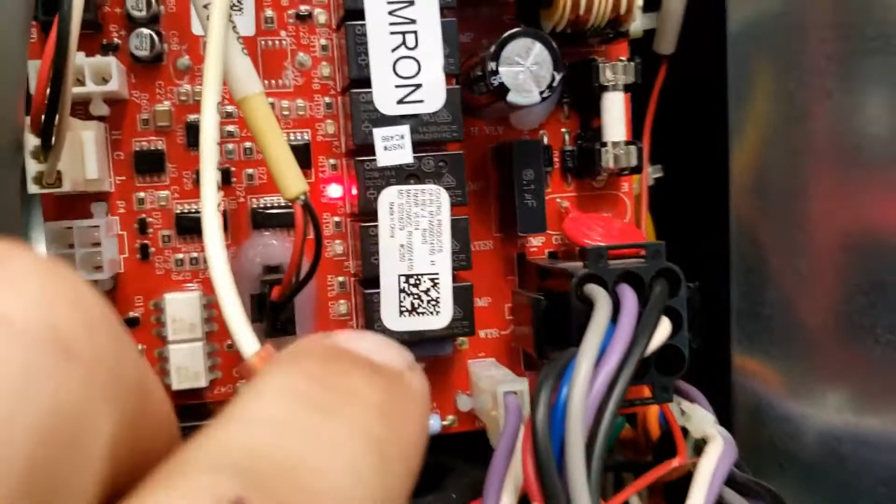Alright, we got an ice machine here. It's doing a little funny thing. Originally said calling for making ice, but according to that, we're not getting the compressor to run. When you come up here, the compressor's not hot, so I don't know why it's not running. It's not even calling for it to run, but yet it thinks it should be running, but it's not running.

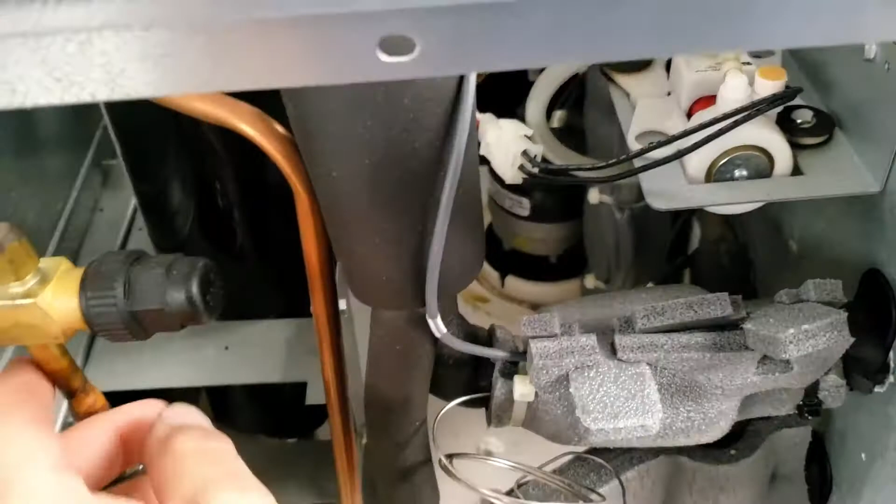Now, that was warm at one time. Yeah, there it is, dumping the water out. This is acting very odd. So right there, it just did the dump valve. It's acting very, very odd. So we installed the control board yesterday. Here's some of the history.

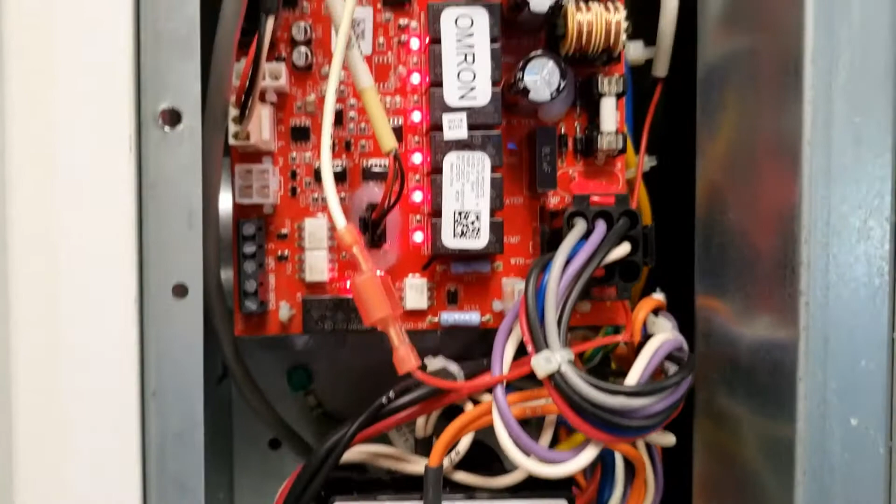Maximum freeze, nothing. That's a little weird. Let's go to that. This is not jiving. Something is very wrong. Okay, enable relays. And there it did it. So we got the contactor in. You can hear the compressor running. You can see the pump there running.

That's hooked up. You can feel that solenoid. And the compressor is definitely running. So everything for the most part looks like it's probably working. Here's the water valve, which we should be able to look down below and see if that's working. Yeah. So the water valve's working. So all the relays are working.

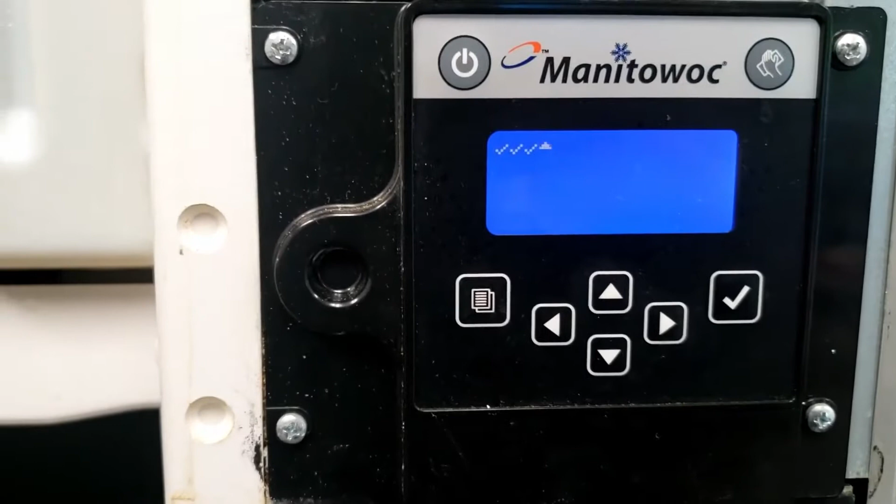Let's do a self-check. See what we get there. Something seems a little peculiar here. But I don't know why it would say it was making ice and then... Okay. Keypad test, so when you do this it'll correspond. So see that one there, top one, bottom one, top left, top right, bottom right, and bottom left. And then you gotta do 5 to the right to get out of here. 5. Yes. So we've already done all that, so we can exit that.

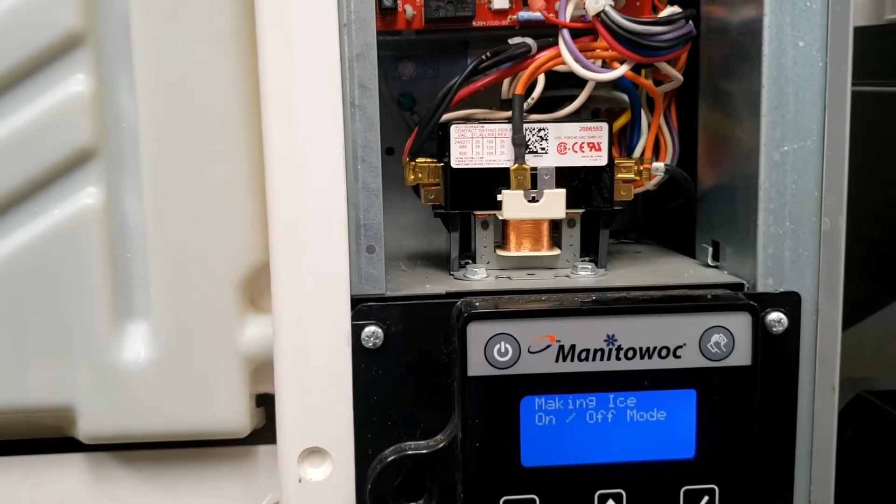So that's interesting. So now let's go to make ice and see what it does. First thing it should do is pump it out and dump it and start to fill and start to freeze with the pump off. So let's see what happens here. So we got to make ice, and she is running the compressor and the water valve is on. This is definitely a little bit odd. It's almost like it had a glitch.

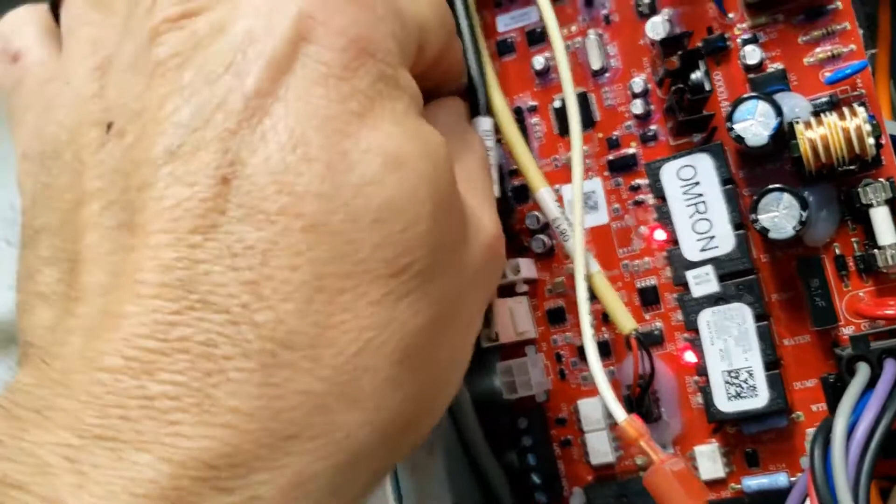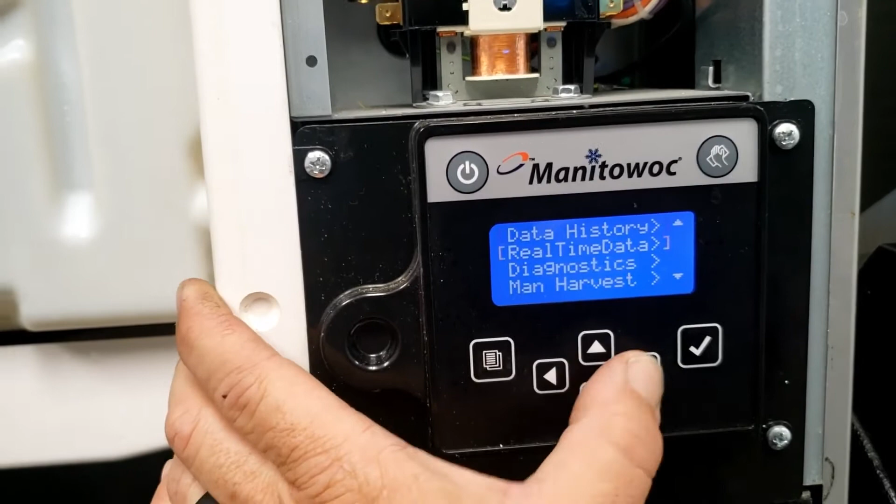These plugs are in. I've already checked my T sensors here. Ground's hooked up. Curtain we know works. We can go in there and look at our thermistors. So discharge gas is 130. Liquid, I believe, 114, which seems a little high. That's where it's at. This will tell you where things are at and what's going on. May have to go up on the roof, take a look. Might have something going on with that. That's not going to help it none if it's too hot.

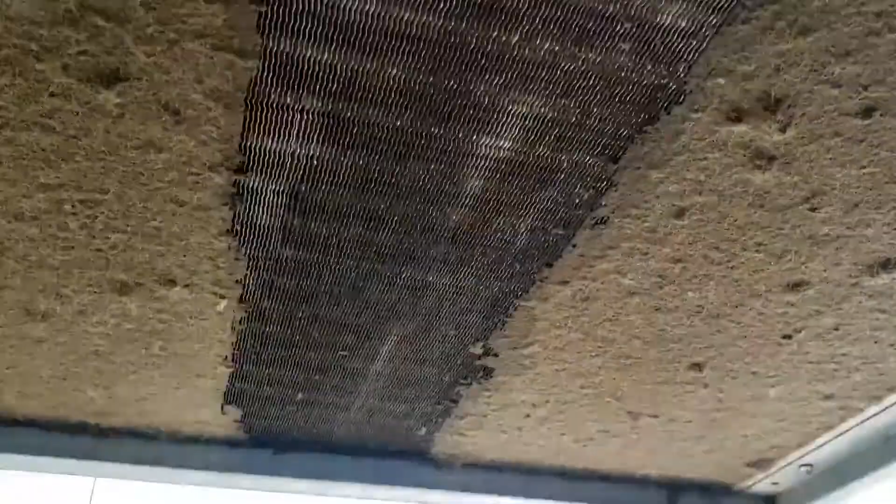See, now we're actually dropping in temp, and our delta T is 3. Usually want 7 or less. That makes me think that coil's a little bit dirty up on the roof, so I may have to go up there and take a look. So I scraped a little bit off there with my brush. You can see it's kind of packed, and the cottonwood's getting kind of bad.

In this location, someone else maintains it until it breaks, and then we get called. So I'm gonna go ahead and finish cleaning this off. Got me a new brush, fancy new brush, and it does a wonderful good job. So just wonderful.

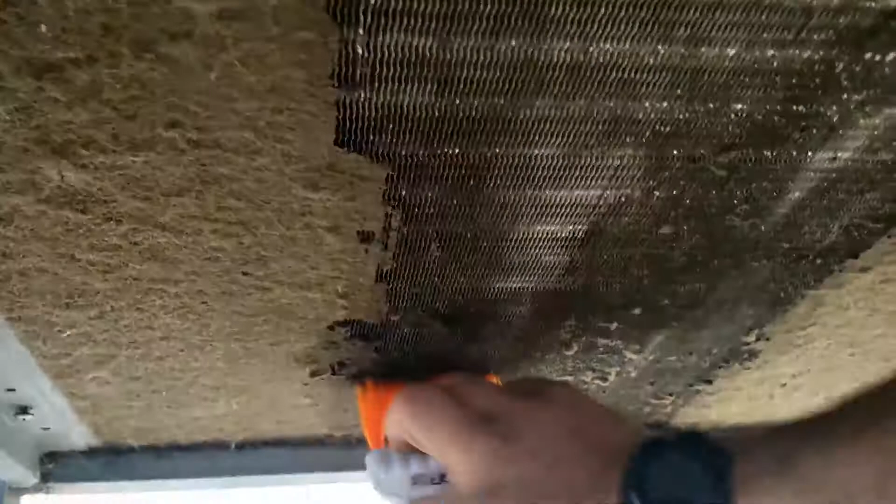So yeah, we'll just get this thing cleaned up, and then we're gonna go down there and see how it does. But what's weird is this would not have caused that board to do that weird thing that it's doing. There's no reason for that to say that it's making ice and it's not, and not run the compressor. So obviously this would cause some issues, but it would not cause the issue we got. Anyhow, we're gonna get this cleaned up.

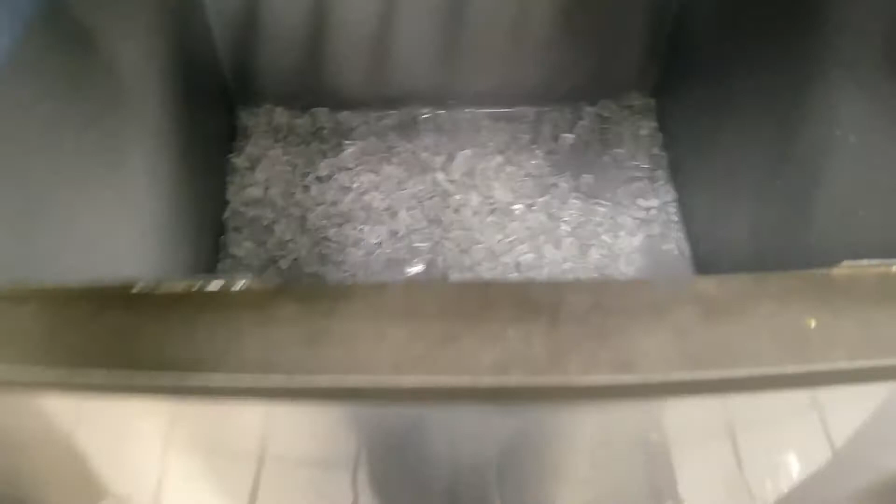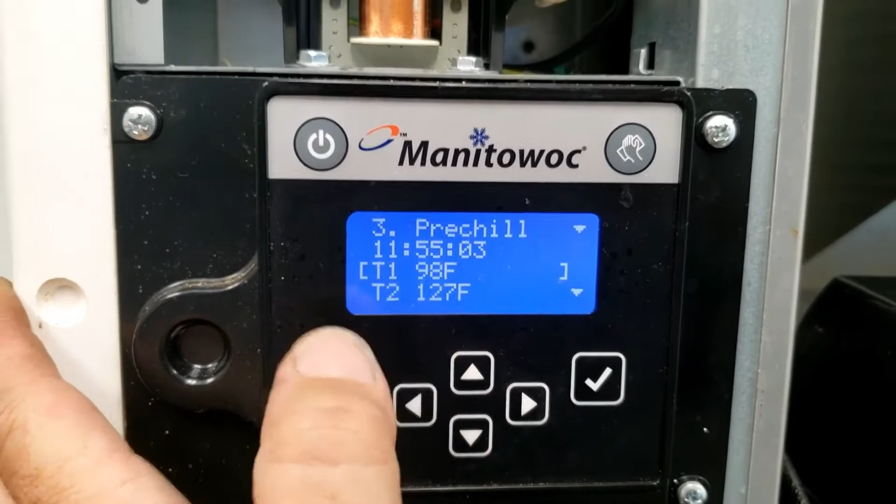Okay, it looks like we dropped some ice because we're in a pre-chill already. Our liquid temperature there is at 98, which is a lot better than 113, which may change a little bit as we start running. We're gonna check our pressures while we're at it, just because it felt a little bit cool up there for being a hot day. Alright, so there's our pressures. We're into the freeze. We'll go ahead and start our stopwatch. We're going to watch that for 5 minutes and see where we're at.

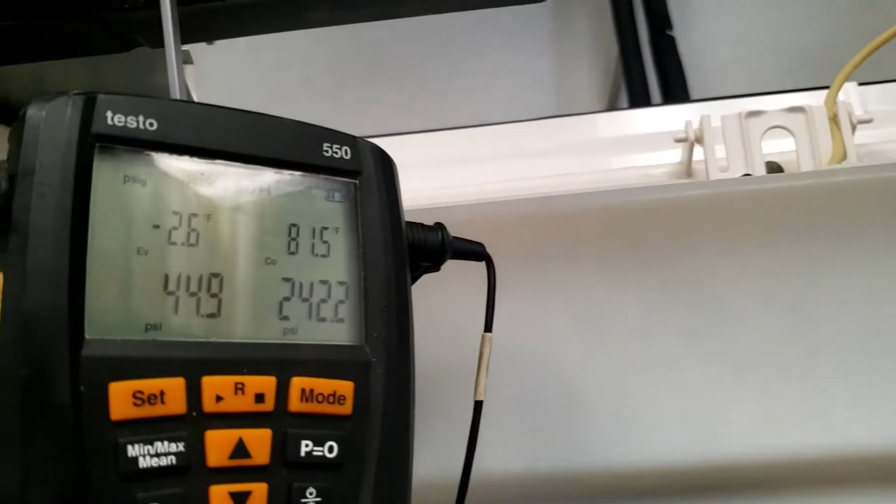Like I said, this is really acting odd. Now it's making ice. Supposedly it was doing fine yesterday after the board was replaced. So we have an IY0696N261. So the I is that it is an Indigo machine. The Y is the type of cube it is. It's a half dice. The 1000 is the machine series.

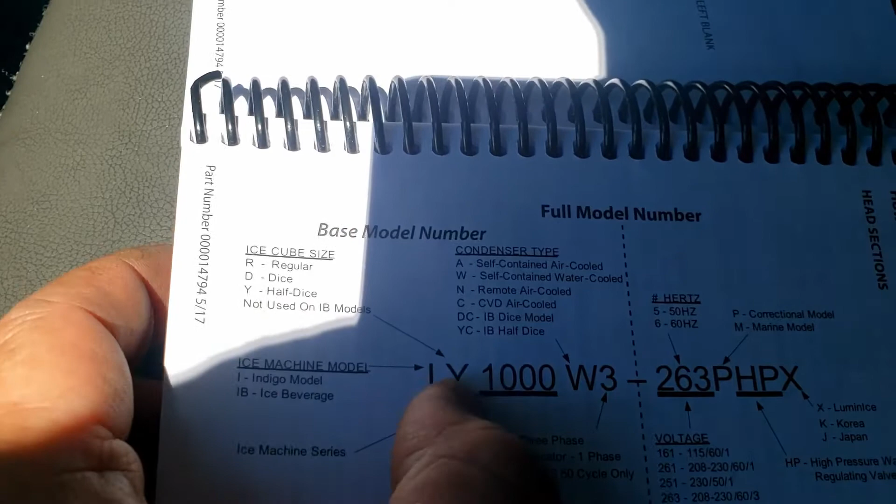They're testing the sirens for the emergency test they do.

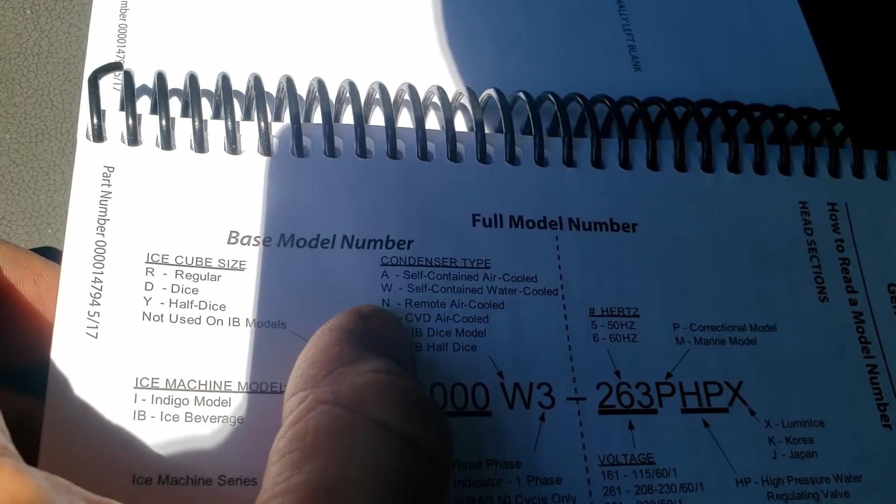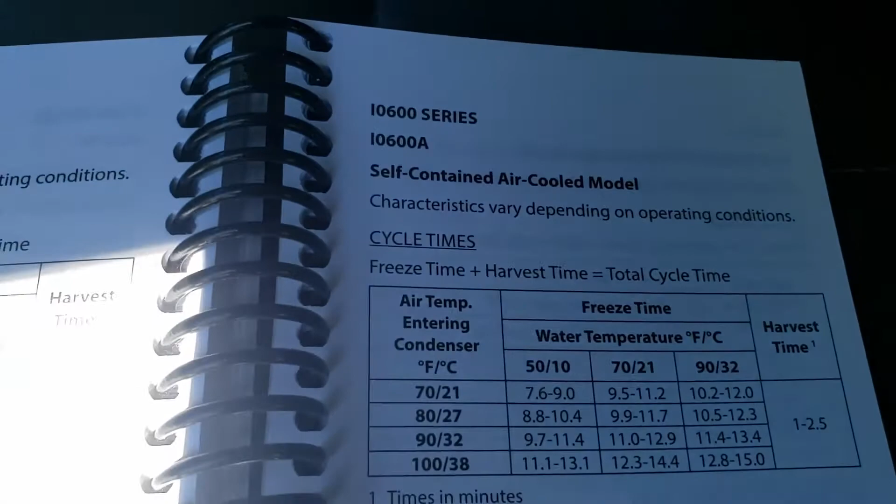So 600 is what the machine is. The W is a self-contained water, which mine is an N for Nancy. So it's remote cooled, that's correct. So anyhow, we pop over here to the IO600 series. So we come down, we look at it. This is self-contained air-cooled. So here's a remote.

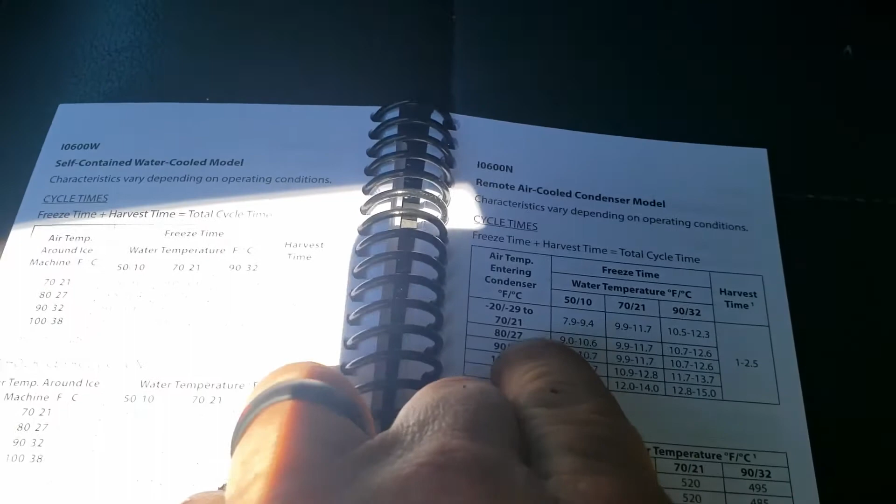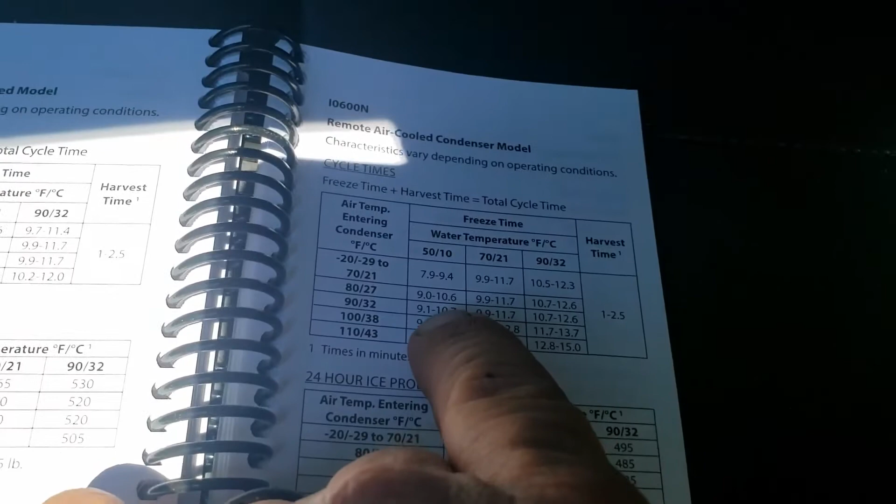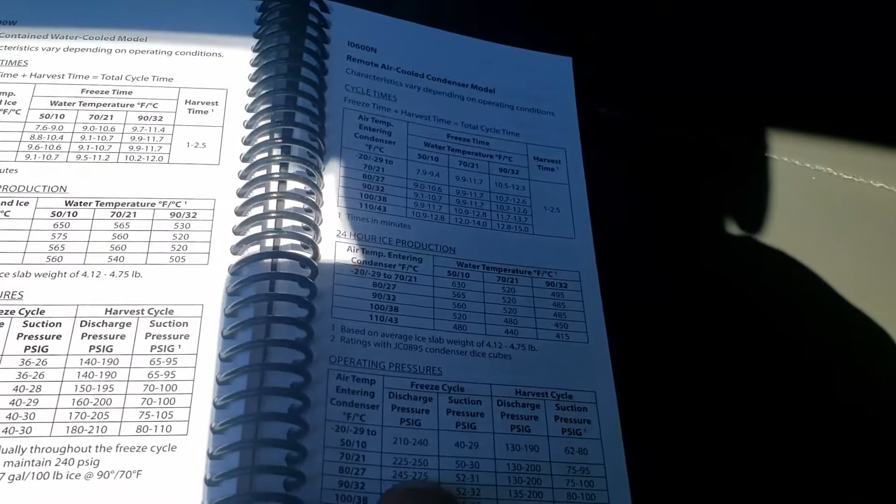So on the air temperature, today's about 85 to 90, and our water's coming in probably in the 50 range. Harvest should be about 1 minute to 2 and a half minutes, and the freeze cycle should be about 9 to 10.7 freeze time. So there's your production and operating pressures. Operating pressures look like it should be a little bit higher. I was wondering if it may be just a little bit low.

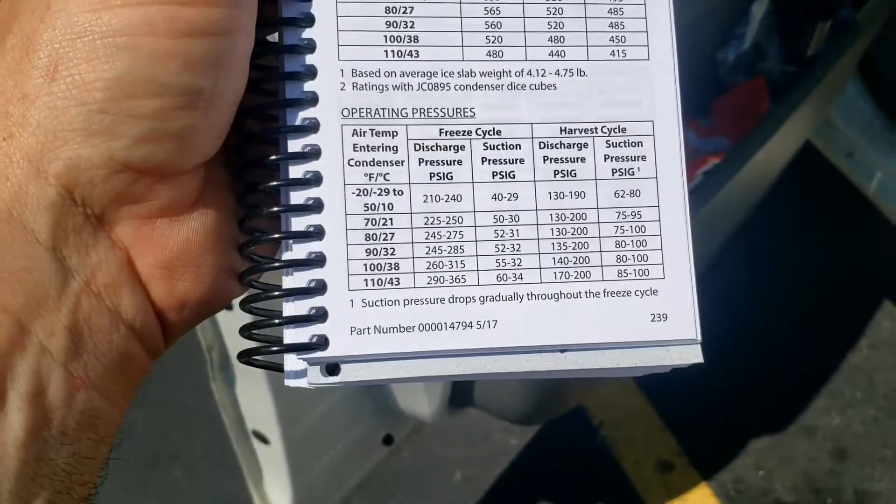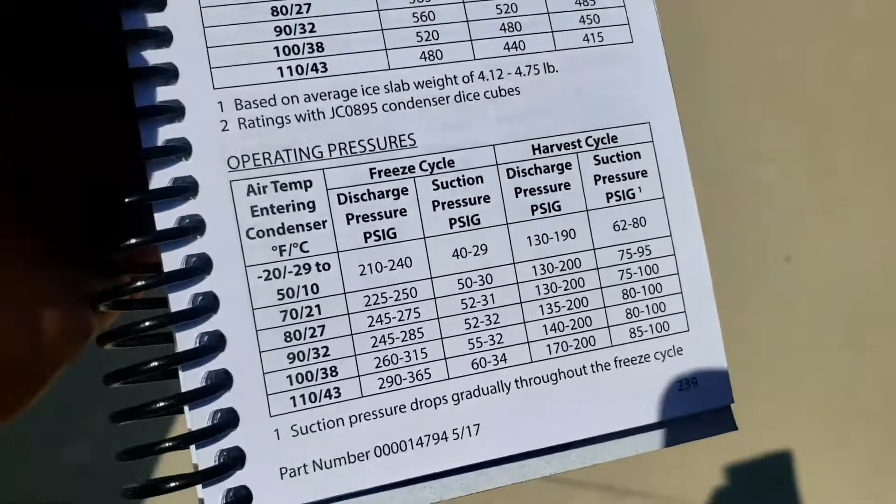Problem with these is you're supposed to pull all the refrigerant out and then weigh it in. We'll go back in there and see what we got. We'll see how long it takes to harvest and freeze. That's the biggest thing. Usually if you can freeze, that's usually not such a big deal. Harvest is where you usually choke if you're low on refrigerant.

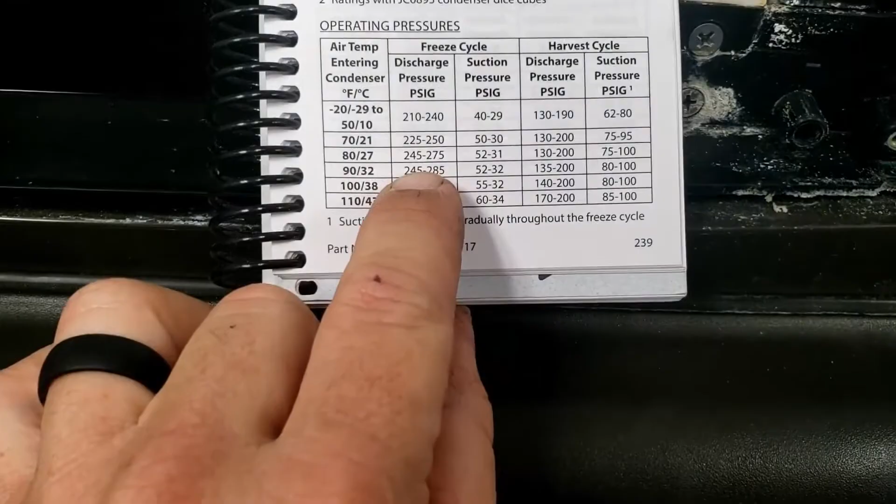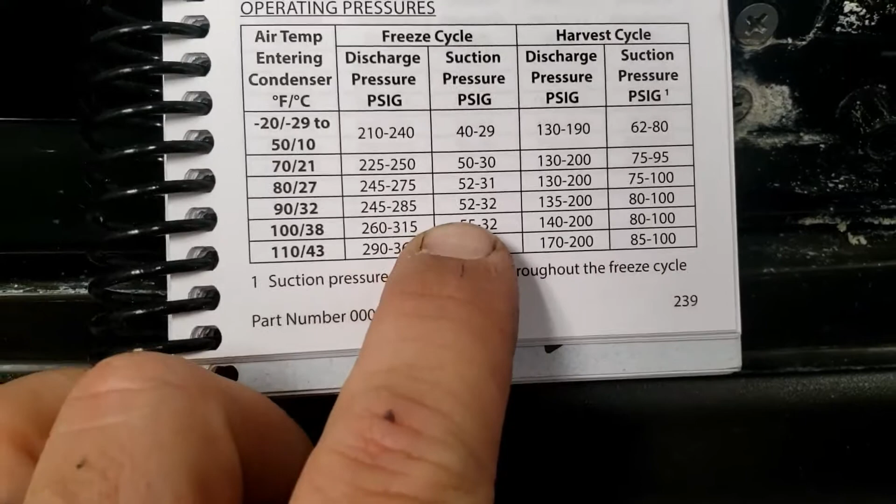All right, so we're about 8 minutes into it, and it's, like I said, about 85 out. So we're running at the very bottom, 245, and suction's around that 41 range. So the 41 range technically works out okay there too. So we're just going to watch it and see how long it takes to freeze. Should be right around 10 minutes.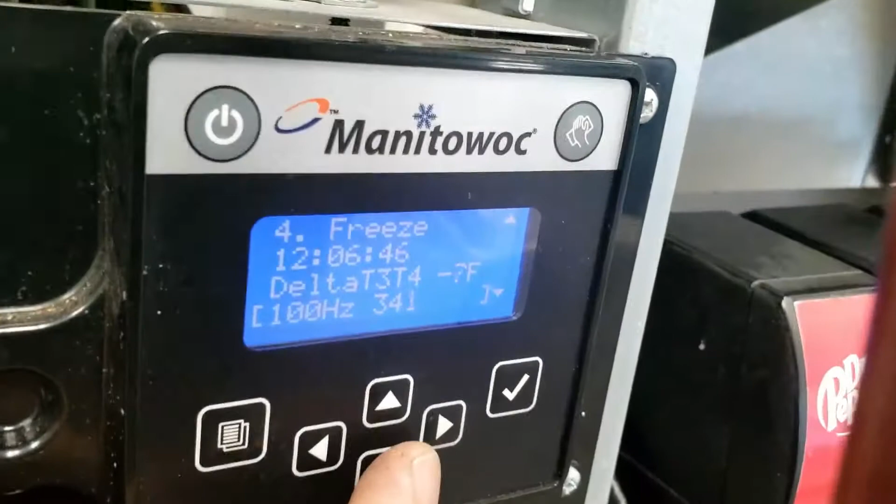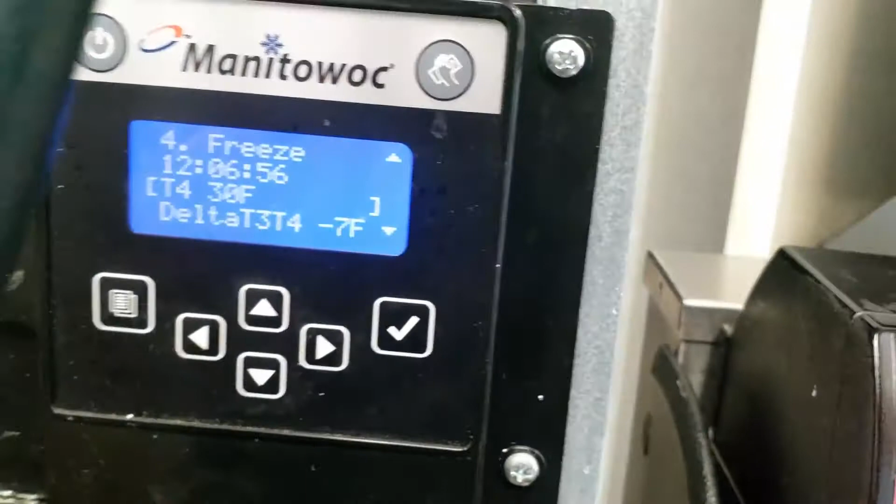Alright, so our delta T across that coil is starting to go out of whack. So that kind of tells me that we might be, now there it's coming back. There's a very good chance it might be a little low. We may add a pound or two to it and get them going. Like I said, it's a weekend. We don't want to spend a bunch of time here.

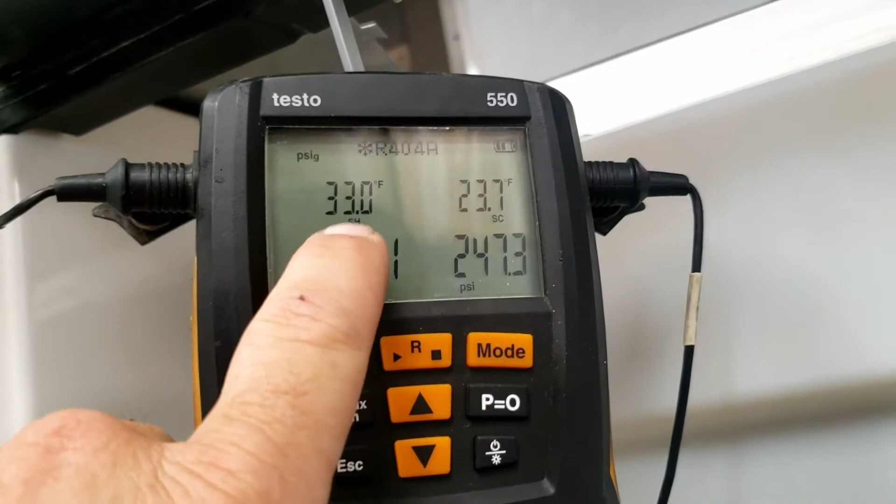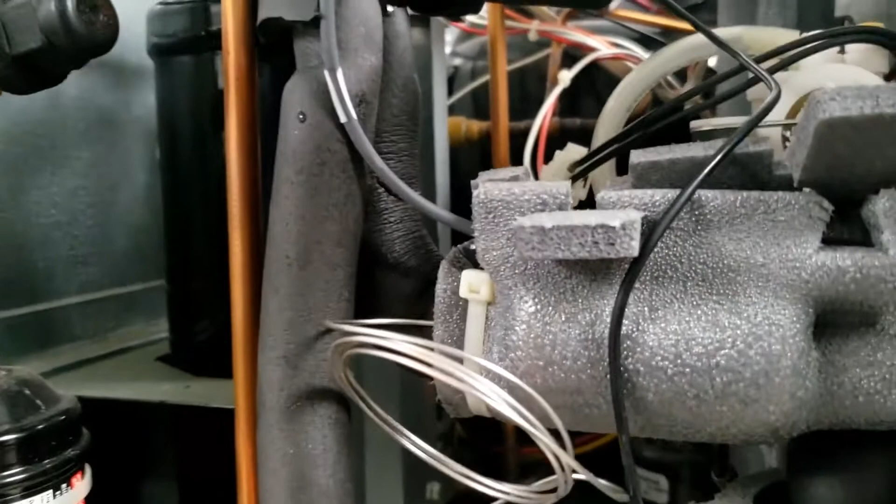Also, superheat on this is running about 33 degrees. Basically, we're coming out. There's our sensing bulb. Here's our TXV. We're getting right there before we start to combine together with the liquid line. You want to do it there so you don't throw off your readings. So everything kind of just leads me that direction. It might just be a little bit low. I am not a fan of those quick connects at all.

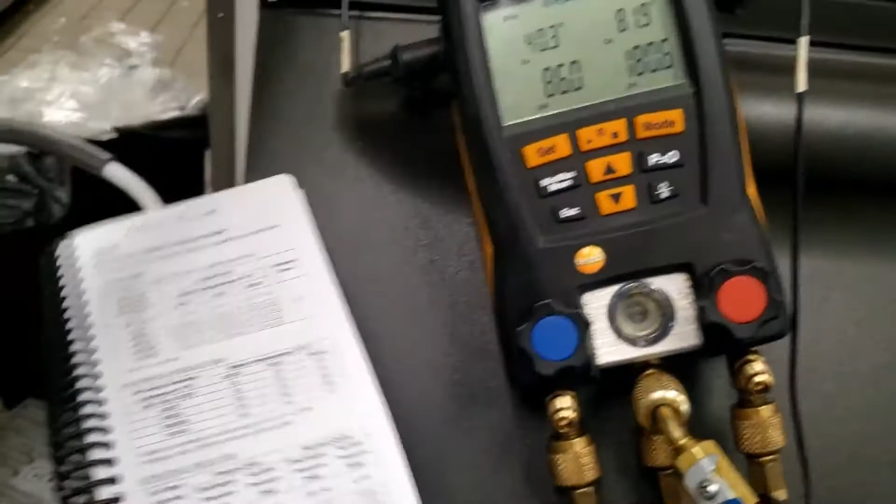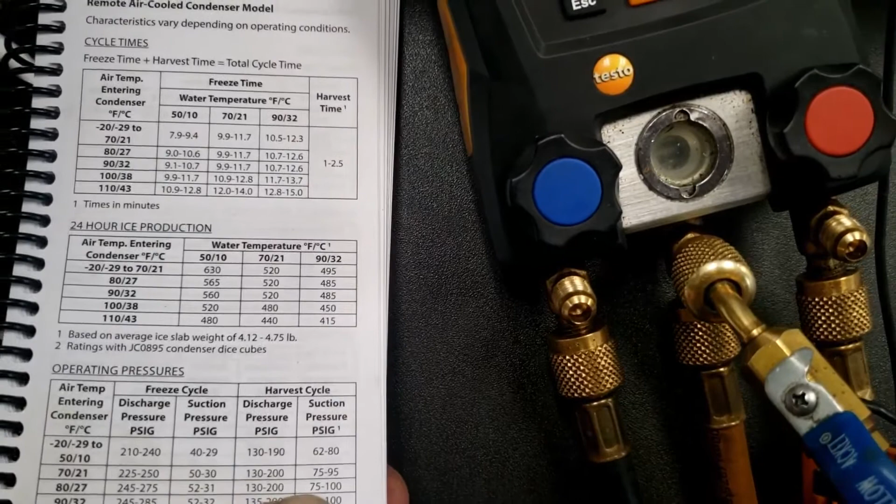Alright, we're in harvest right now. About 1 minute and 20 in. And you look at your harvest pressures for around 80 degrees. It'll be 130 to 200 for your head, and 75 to 100 for your suction. So I went ahead and added about 2.5 pounds to it. It holds about 7 pounds.

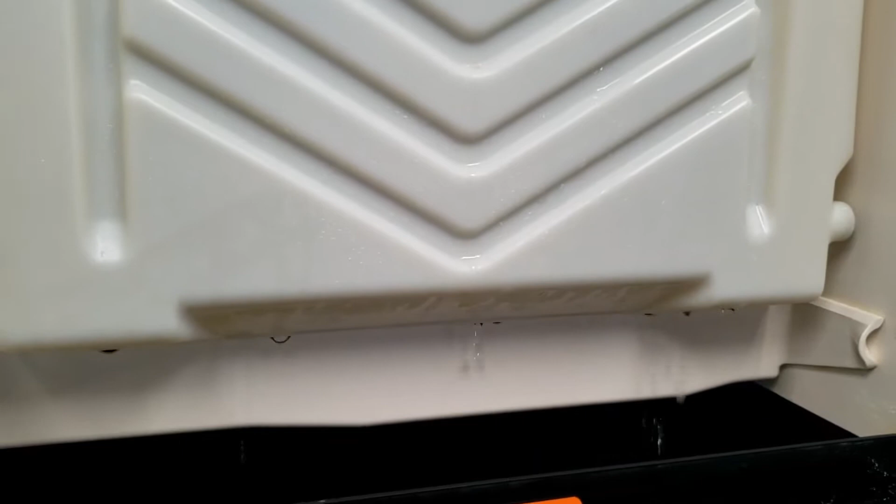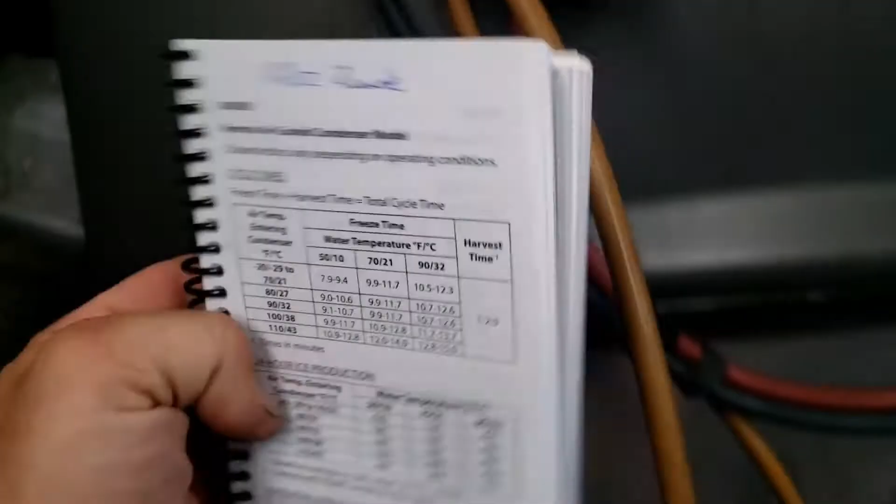There it comes. Gonna drop. That ain't good. Yeah, it's got some issues. But yeah, we added 2.5 pounds to it, and I'm gonna go with that for right now. We're gonna need to come back and probably do an extensive search on it, depending on whether he wants to or not. Just watch it again, see what we get.

I'm gonna thicken that up a little bit too. I think it's not quite heavy enough to drop correctly, and I don't know when the last time this thing was cleaned. Cleaning's key to a nice slippery coil to watch your ice fall off.

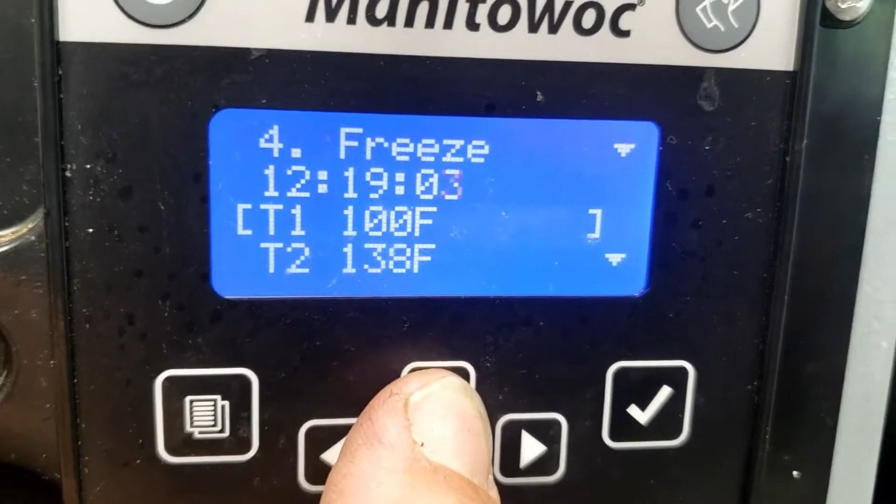Alright, so we're running 100-degree liquid, extracting about 38 degrees of heat out of that, and our delta T between our in and outgoing evaporator plates is 5. So we're running about a 27-degree superheat, which seems a little high, but it seems to be feeding pretty good and freezing fairly decent. So if it ain't broke, don't fix it. I mean, if it's not causing the malfunction, they're not going to want to change anything. Run her until the wheels fall off type thing.

So basically, after adding that to it, we're going to retime it here and see what we got. She just went into harvest. That's after I adjusted it a little bit thicker. We're going to do a scan there with the Stratus, see if we can find a leak on those fittings or somewhere, wherever it's hiding at. See how long this thing takes to drop.

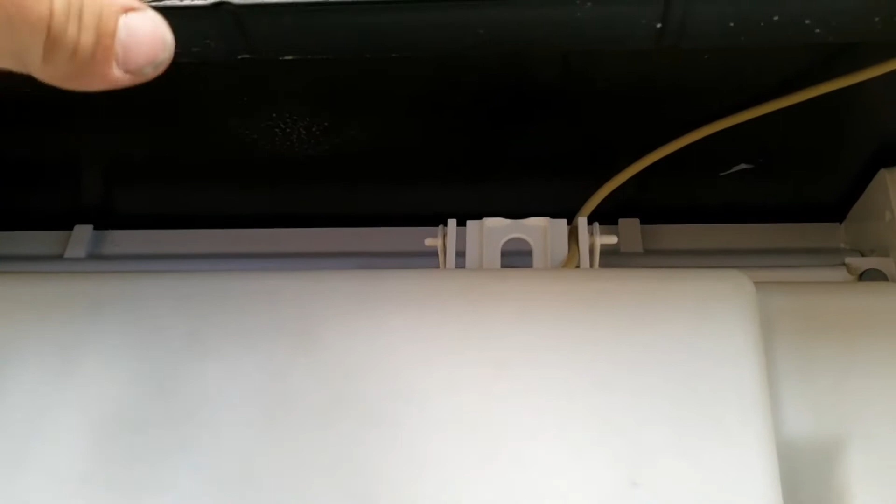A little more weight, fell a little bit better, right at a minute 21. Looks a little bit better. Alright, we went ahead and emptied the ice out of here so we can see exactly what we got. And basically, put it all back together, which is how you really want to test it out. You want all that heat blocked out as much as possible. Technically, you want this door shut. Any of the heat from inside here can cause a lot of things to be off.

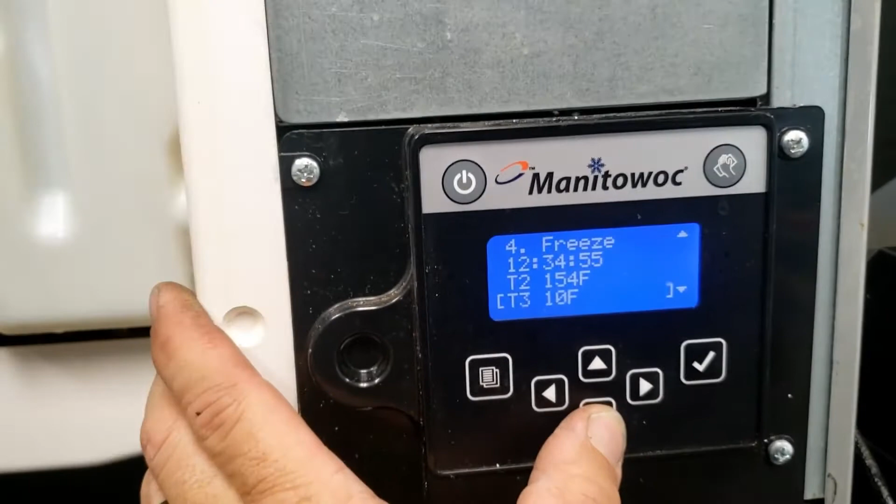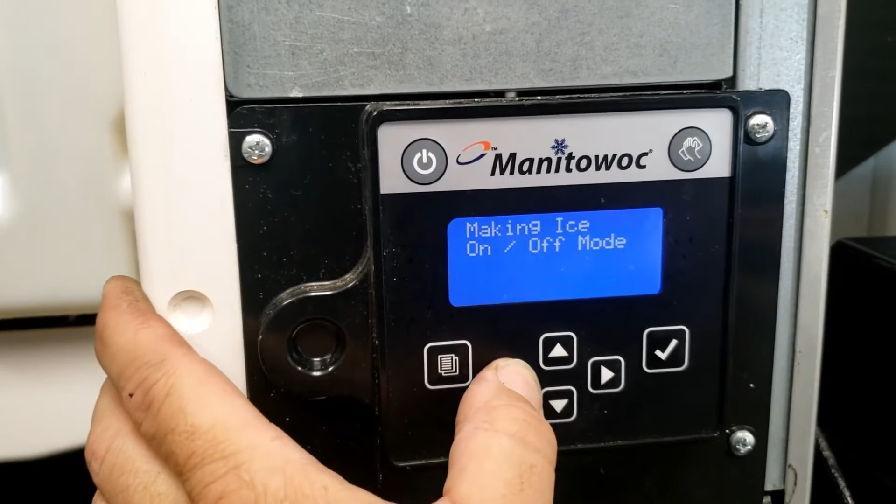So we went ahead and scanned it for leaks. I didn't find anything down here, which, you know, it very easily could be in the coil up on the roof. But we're going to leave it up to them whether they want to look any deeper for it. And like I said, this is not the right way of charging it. You're supposed to pull it out and weigh it in.

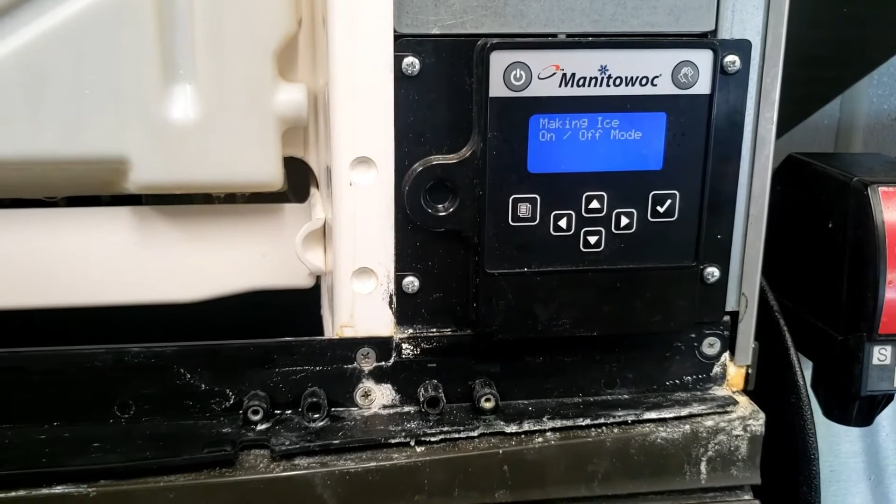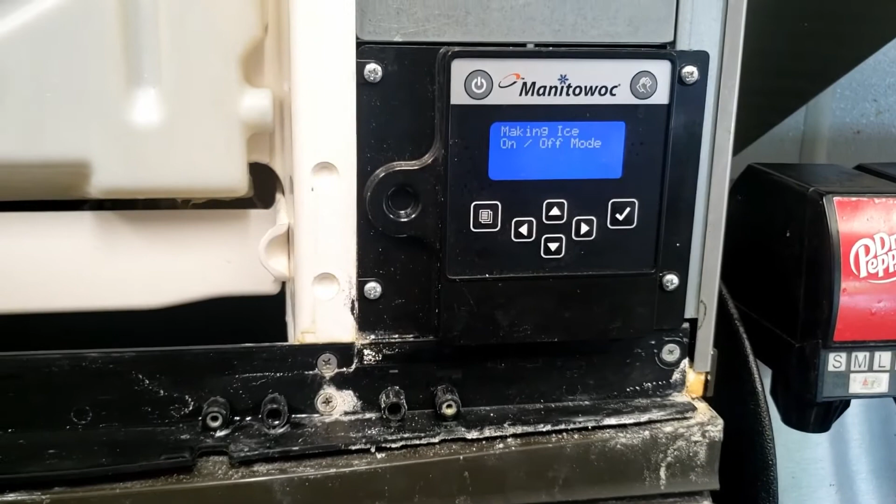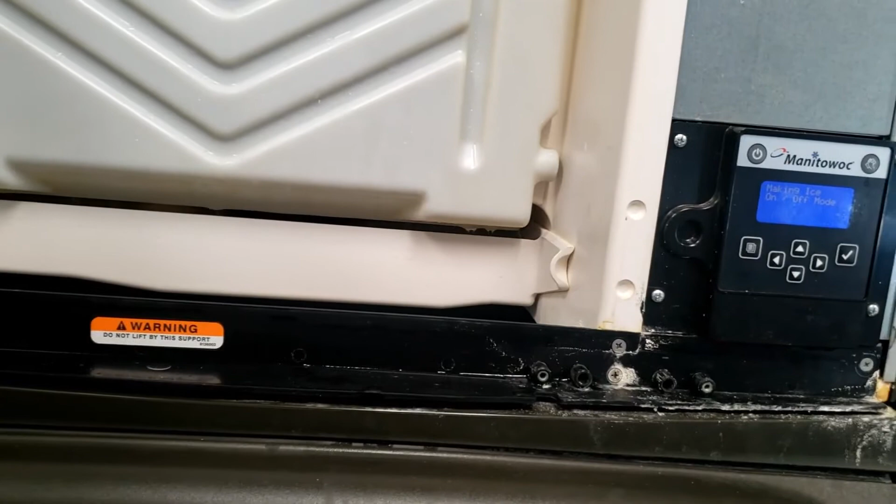But I also looked at the total charge, which is 7 pounds, and then I added a little bit to it. I kind of based it off of my superheat of my valve and my liquid line temperature and condensing temperature, along with the charts of suction and pressure with the ambient all combined together. So that's how we kind of came up with it. So not everything is done exactly by the book, especially on a Saturday when you're trying to get this done and get it out of here, get them up and going. Because as you can see, once that's gone, they wouldn't have ice for their drinks.

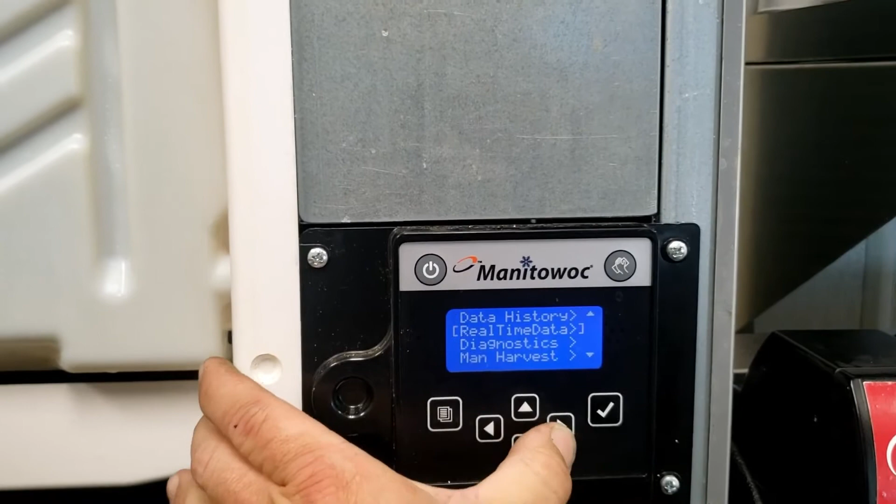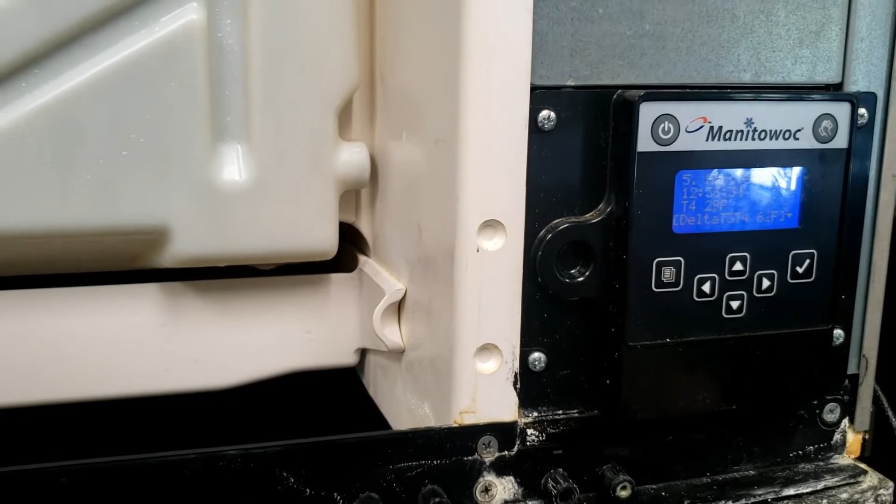So it sounds like it's getting ready to go into harvest now. Yeah, it is. So we're going to time this again. We're off by a little bit here, so we'll add about 15 seconds to it. These aren't quite the same as the old ones that used to have only 3.5 minutes. These have got a little bit longer leeway on it, and then the newest ones basically have an even different one than what the Indigo here's got, as far as timing before it malfunctions and locks out.

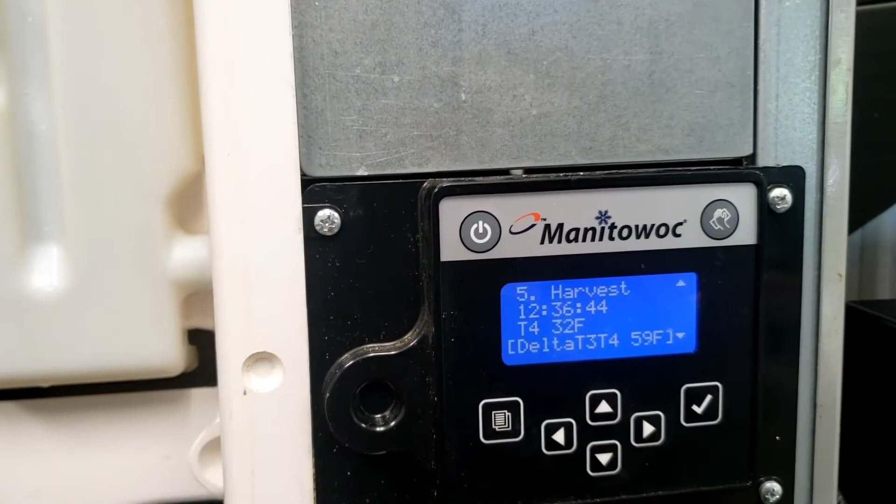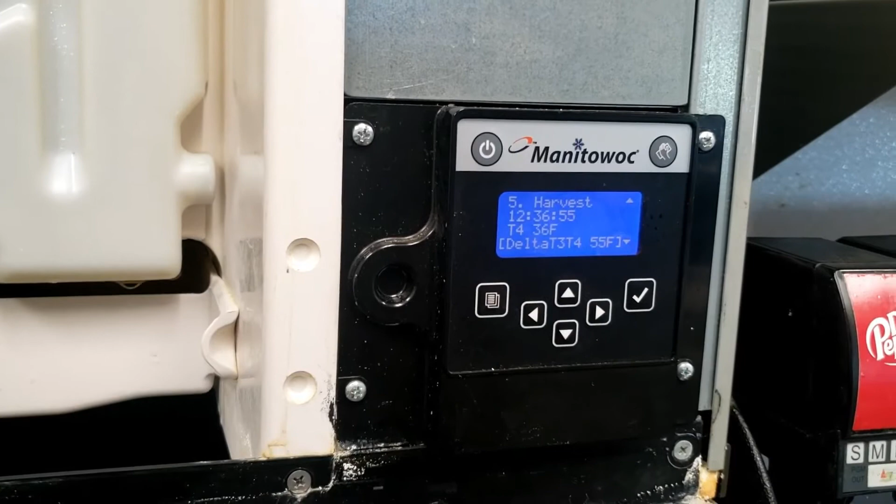But like I said, nothing here explains why this was running without the compressor, and yet it wasn't locked out completely, but yet it was trying to run. So unless they got some sort of blip, maybe something didn't save correctly, I don't know what, but we did make it better. It's running cooler. There she goes.